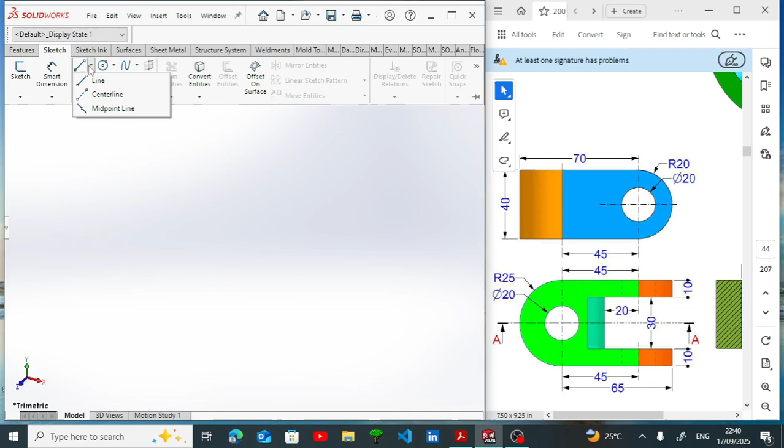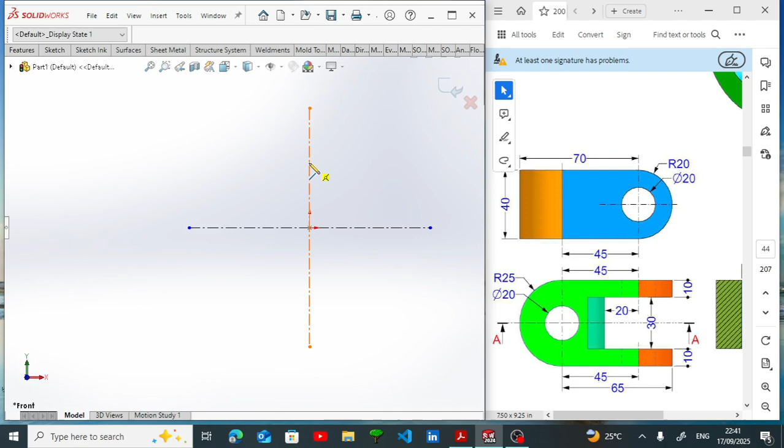We need to start with a line. Okay. We change it to construction line. For proper alignment, let's do this. Okay, it's already aligned, properly aligned. So let's give dimension now.

See, here is 10 mm at this point here. This also is given to be 10. So just hit enter, and the inner part here is 30. 30, and here is 20. 20. Now let's use an arc, 3-point arc from here to here.

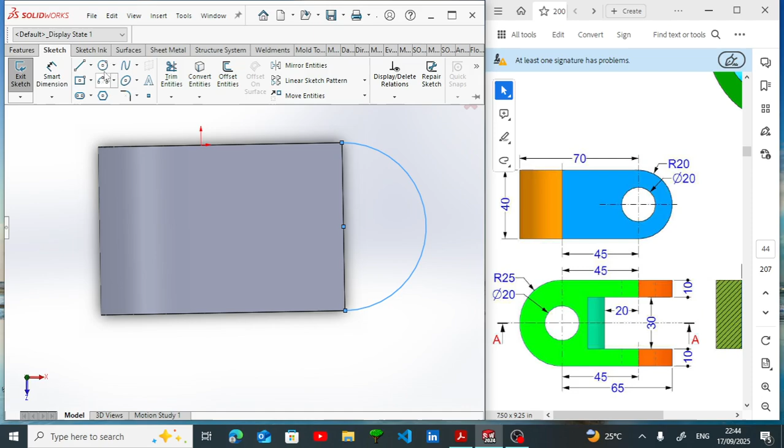Now we are going to sketch on this side, which is this. So let's do that. Let me show you guys the message. Okay, it does not show. Okay, I'll choose this plane. And I'll start here to this point. So I'm going to sketch a circle here.

Now let's give dimension. Dimension of this is 20. Surely, since the total extrusion from here to here is 40, the radius of this is going to be 20, since the center lies here. Let's check it out. 20, and this is 20 also. The diameter of this is 20.

So we're supposed to draw a line through here to close this, to make it a closed entity. But if you don't want to do that, you can do this instead. Convert entity, select this line, and convert it to entity. So this line here, this edge, automatically comes back as a line, making the entity closed.

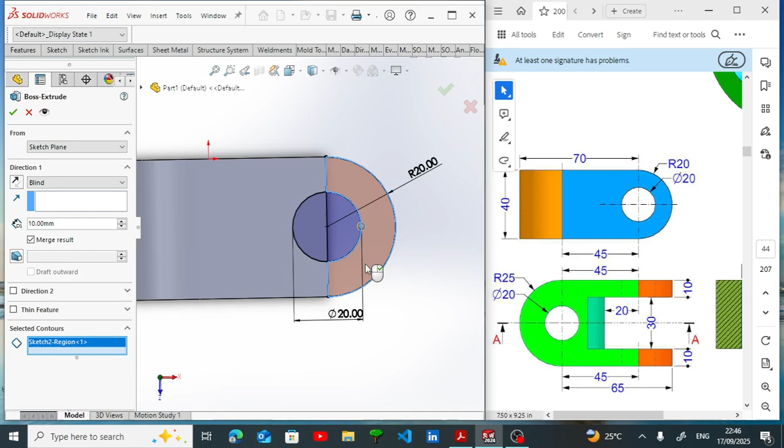So let's go to features, extrude boss base. The extrusion is 10 mm. You can see it from this side. The extrusion is 10 mm. So let's rotate, but it's pointing outward, and you can see down here selected contour. This is showing because we have multiple boundaries. So I'm going to select this only as my boundary where it's going to extrude, then rotate.

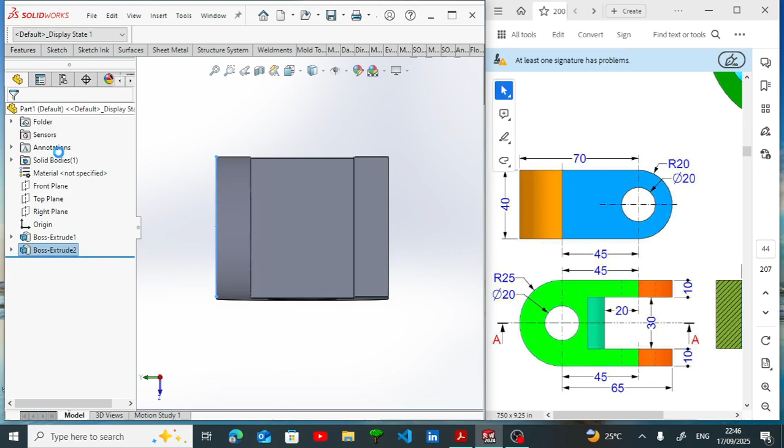But you can see that the arrow is pointing outward instead of coming inside there. So change the direction here, then hit enter button. But we have a circular cut here, but this is just a semicircle. Go back to this, the latest operation you carried out, this small button at the back. Come here and go back to features.

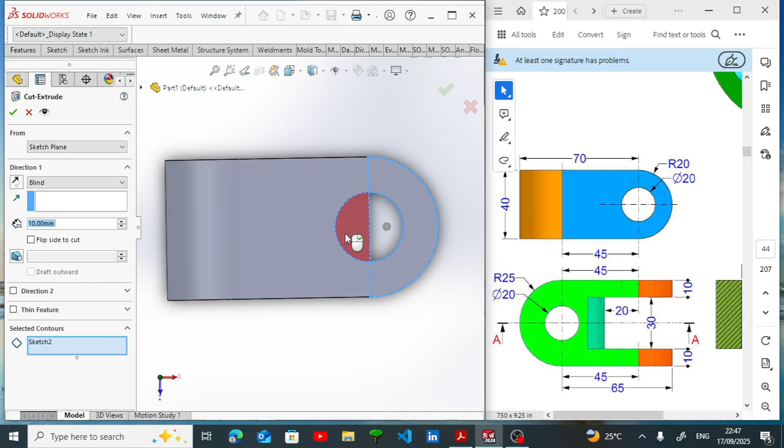This time around, use extruded cut, and select this to cut that particular part. Now you have your full circle. But this same process we just carried out now, we have it on this other side also. So how are we going to do that? We're going to use mirror feature.

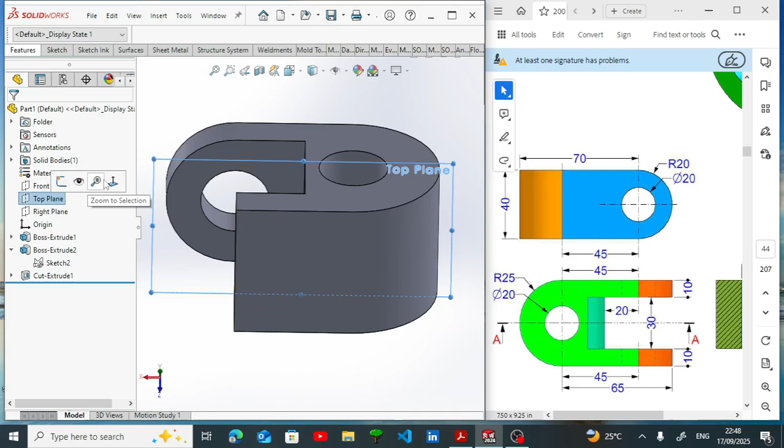So from here, you're going to choose a plane that runs directly, that is parallel to the feature you want to mirror. So let's check front plane, no. Top, yes, top runs directly through the center. So go to features, mirror, mirror face or plane, top plane, then our face. For better accuracy and speed, just come up here to this button where you see default and all this.

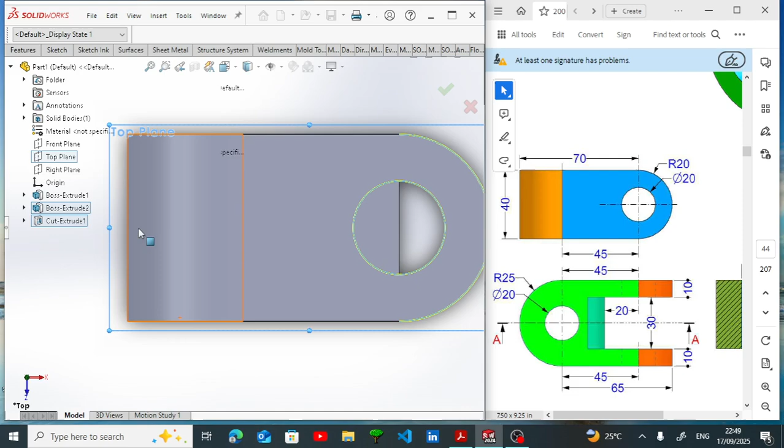Click on this button. So the two things we want to mirror are boss extrude 2 and cut extrude 1. Yours might not be boss extrude 2. It depends on the activity you've already carried out as you open your SolidWorks. But here mine is showing boss extrude 2 and cut extrude 1. So those are the two features I want to mirror. So I select them. You can see the preview. Hit enter button. Now we have our features.

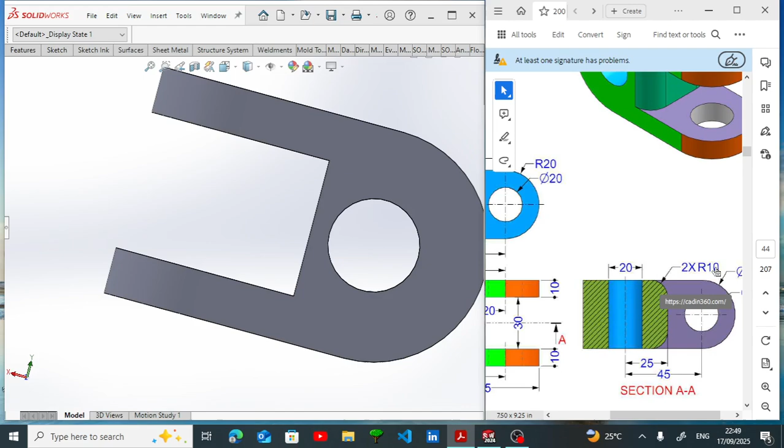But if you look at this place, there's a fillet here. The fillet is shown here. The radius of the fillet is 10 and is applied to both sides. That's why you have 2 x R10. So let's go to features and fillet. Radius of our fillet is 10 mm. So select this edge.

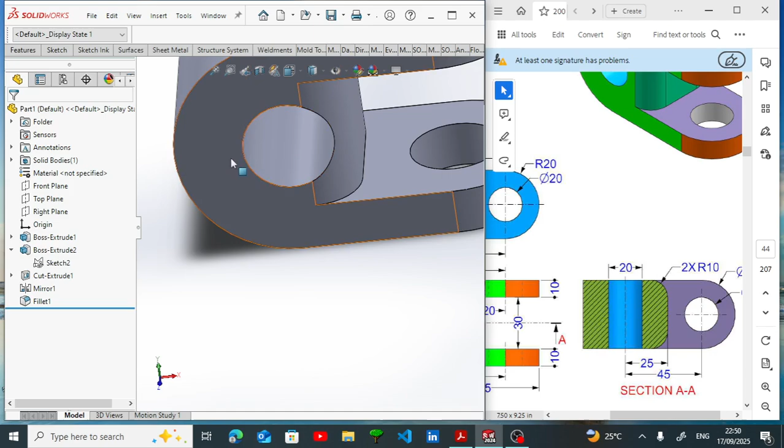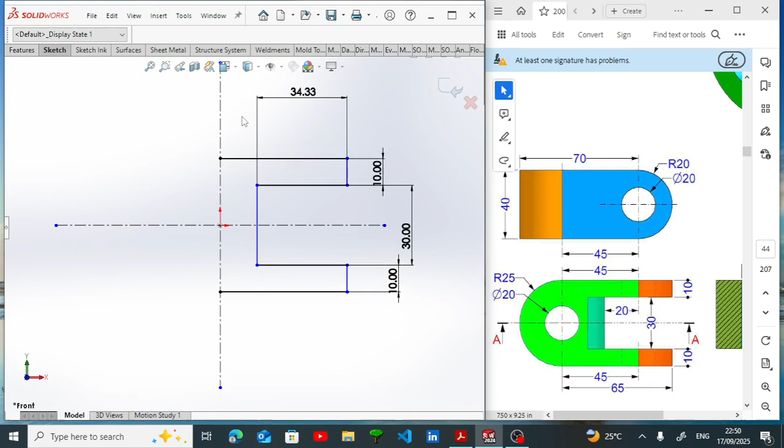I think I've made a mistake while sketching. I didn't give the distance from here to here. There's a mistake in the sketch. So let's go back and see the mistake. Now, you can see that from here to here is 45. It's 45. I didn't give the dimension earlier on. So 45. Now let's extrude.

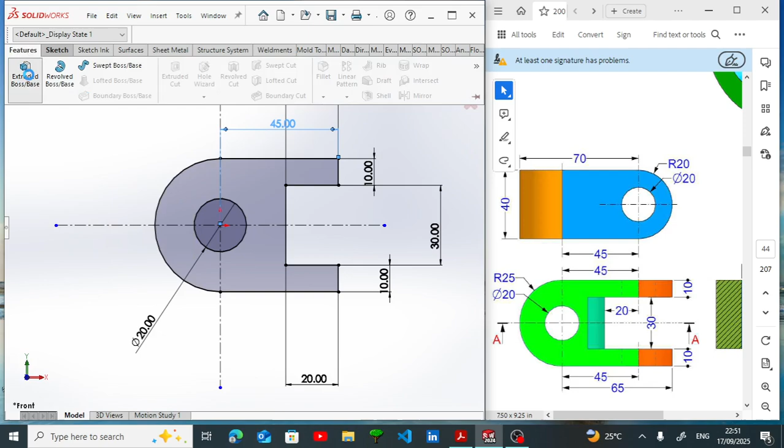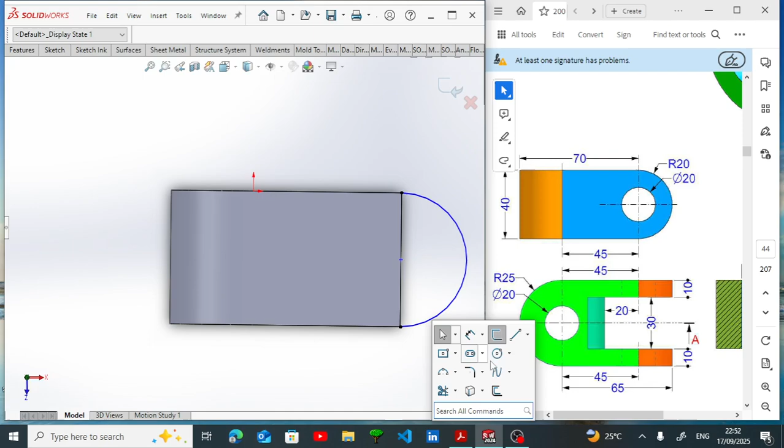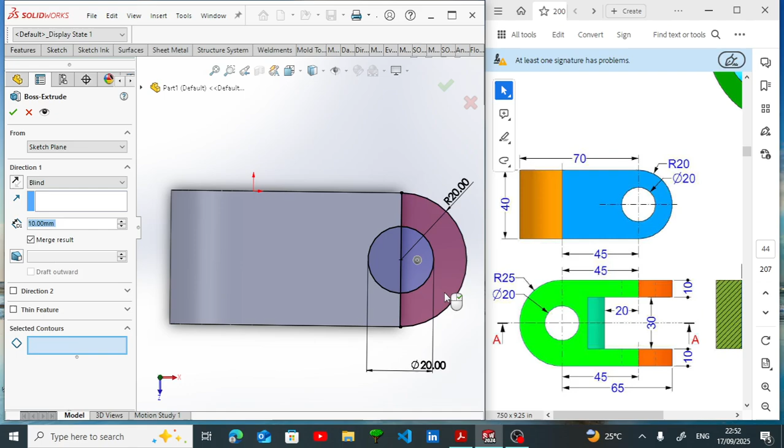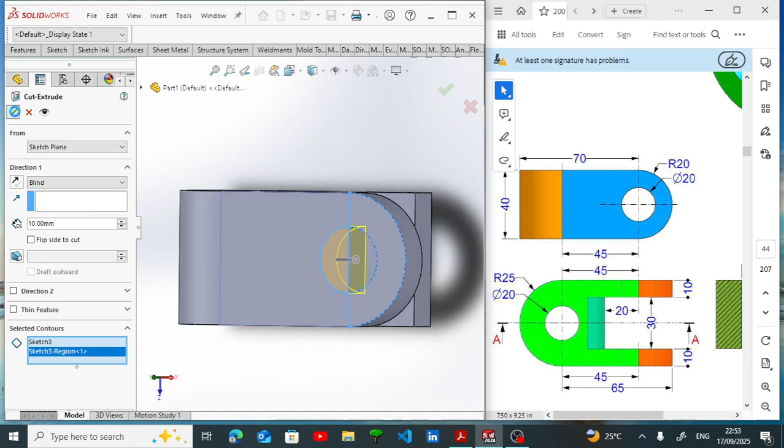Extruding by 40. 40. In the second round, the same operation I carried out earlier on. Now it's time to mirror. Features, mirror, and change, not like the former one I did.

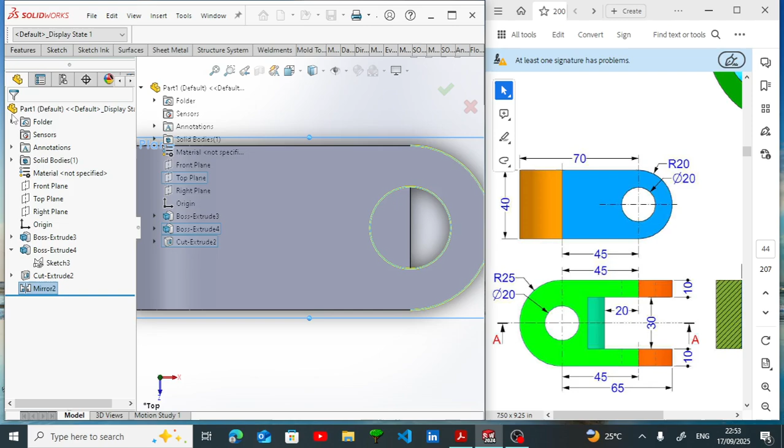So let's apply the fillets now. Fillet radius is 10 mm. You can see the difference between what we did earlier. When we filleted the first one, the fillet cut across this circle here, which is wrong. I was able to correct it.